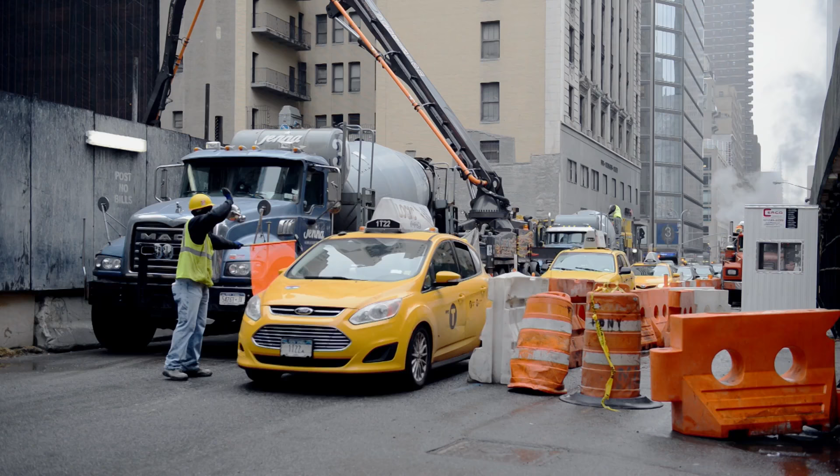The Woolworth Building, Chrysler Building, the Empire State Building. And at the time they were being built and topped out, 7 of New York City's skyscrapers were the tallest in the world. But after decades of rapid development, finding somewhere to build is tougher than ever. So as the population continues to grow, you need to come up with creative ways of how to build supertalls in Manhattan. Demand for high-end real estate is through the roof. In a city legendary for building big, raising superstructures no longer seems possible.

For thousands of years, Manhattan's 60 square kilometers was more than enough space for the indigenous Lenni Lenape people. The only dwellings they needed were modest bark-covered dome huts. But after European colonists arrived to the island in 1609, multi-story homes became particularly useful for the expanding population. The following century saw such rapid growth that by the late 1800s, the only way was up. And New York opened the world's first skyscraper.

Hooray! Bradford Gilbert's 11-story tower building sparked a frenzy of construction, which birthed more world record-breaking tall towers than any other city on Earth. But all this wild development has reached a tipping point, and New York is running out of space to build. But now, engineers in New York are taking on that challenge. Jutting out from the swarming skyline is an entirely new type of superstructure.

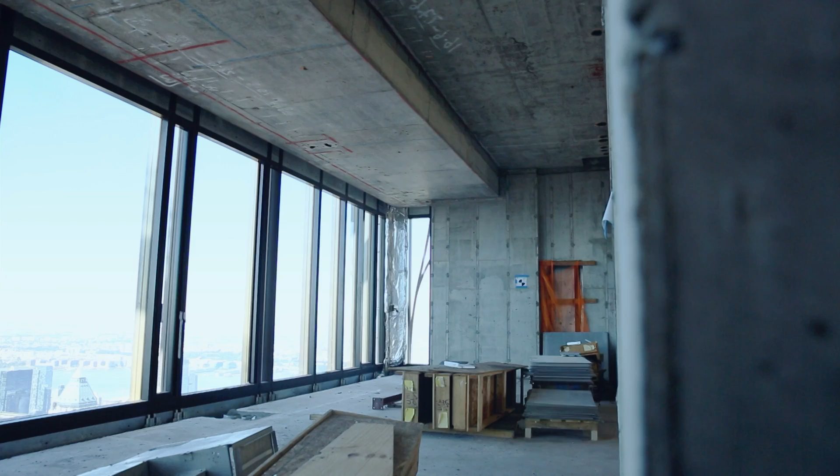This is 111 West 57th Street. Not only one of the tallest residential towers in the world, but also the most slender building ever constructed. Designing a building like this is a once-in-a-lifetime opportunity. This is definitely one of the most complicated, if not the most complicated, residential build going on in the world right now. What you don't see is all of the engineering feats that are behind the walls. You have all these different components that are tied together that are just incredible. Protruding from the ground, this gravity-defying giant marks the dawn of a new age of skyscraper.

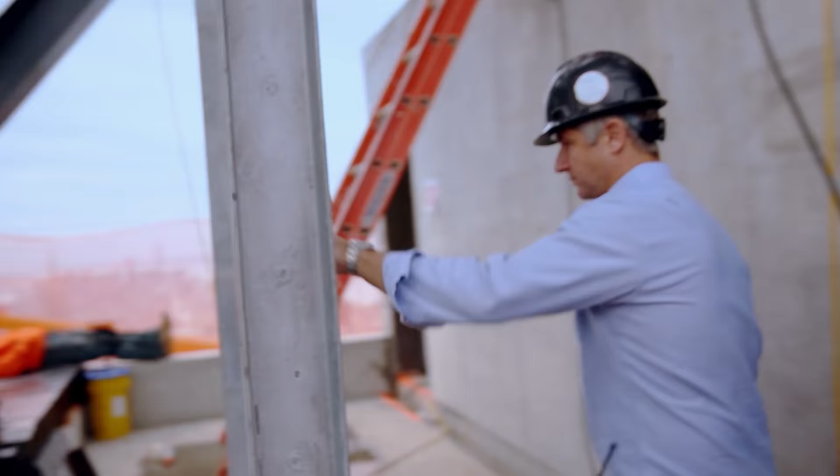Takes about 7.5 minutes to get all the way up. It's a pretty nice ride. Going all the way up, Tommy. Once you clear all the surrounding lower buildings, at this height, it's another planet, another world. This is the reason why we're building this. At 85 stories above the ground, the construction hoist reaches its limit. To venture even higher, John must climb to the steel summit.

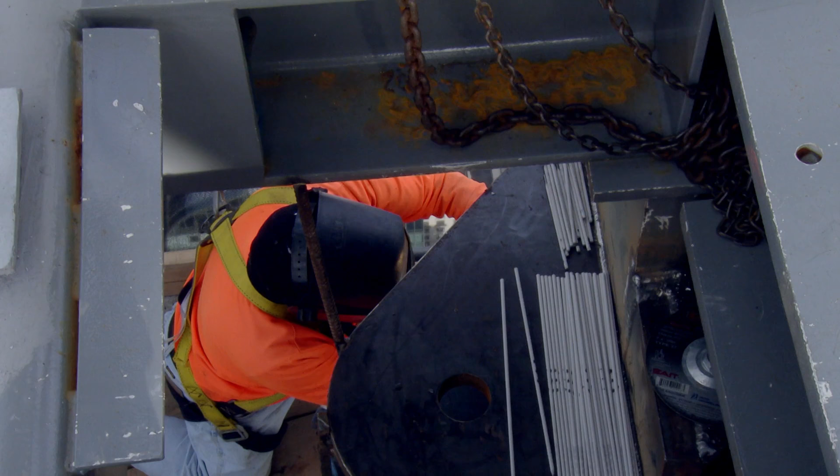So right now we're standing higher than any of the viewing platforms in all of New York. When you're up at this elevation, you got 360-degree views of everything surrounding Manhattan. You got Central Park to the north, Statue of Liberty, the Freedom Tower. It really is just breathtaking. It's iconic and has the same type of feel that the Empire State Building had when it was being built.

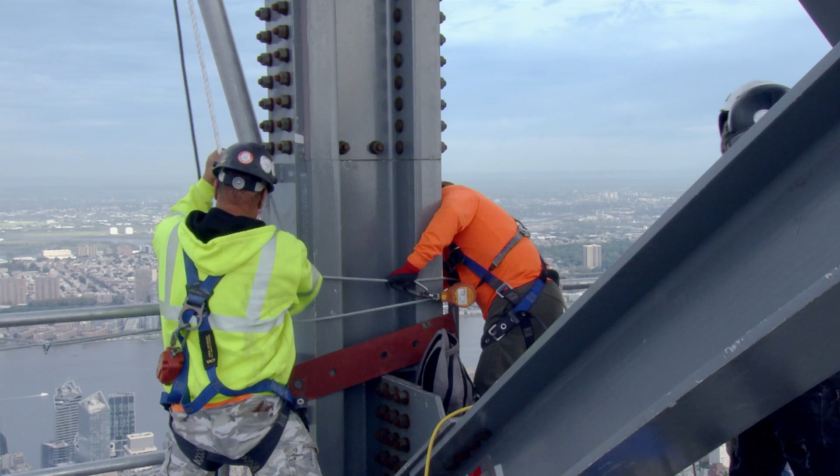111's daring construction team reach heights few have ever been to. They are the only people to have ever experienced the tower's unrivaled views over New York City. Up here, we have ironworkers. They're bolting up, erecting the steel, which is pretty challenging up at 1,300 feet in the air, up to 1,400 feet. It's pretty intense. Every day, I'm blown away by the amount of engineering and time and planning that goes into putting this type of a building in place.

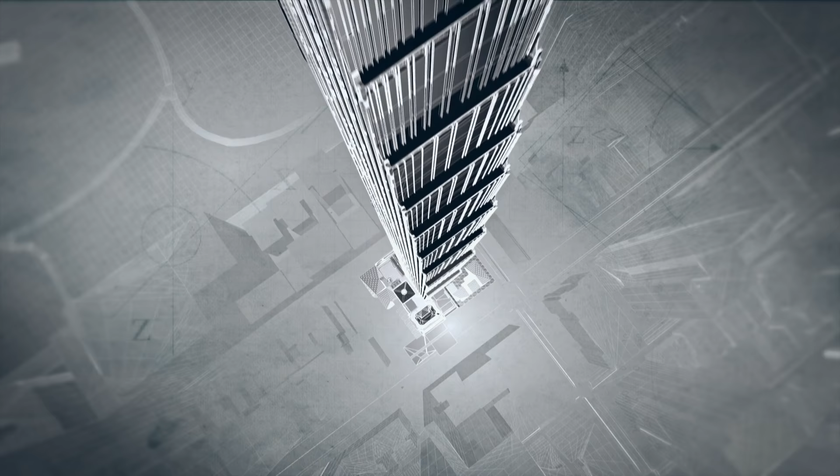Partially built over the historic Steinway Concert Hall, 111 West 57th Street sits on an astonishingly small plot. The tiny 18-meter wide site bears New York's third tallest tower that reaches a staggering 435 meters into the air. With a width-to-height ratio of 1 to 24, it is the most slender tower on the planet. The tower is flanked to the east and west by huge concrete shear walls, 383 meters tall, and capped by a 52-meter steel crown, making it the second tallest residential building in the Western Hemisphere.

What gets me out of bed in the morning is to take on the challenges of finishing this, putting this job together, and getting it to completion. So there's no rest until it's done.

But this ambitious project poses serious engineering challenges. How do you strengthen a skinny structure without giving up floor space? The challenge is, how do we get rid of columns like this, minimize it, to open up the floor space? You can't just take the columns out. There needs to be something there that supports the actual structure itself.

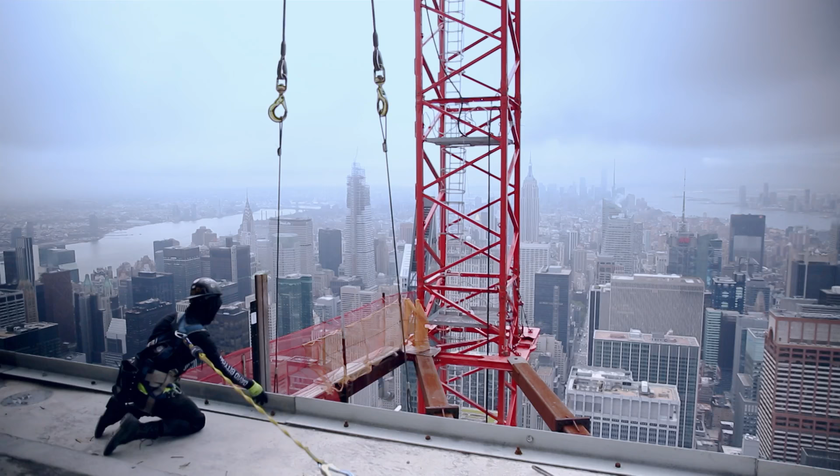And to make it all worth it, where do you find colossal, crystal clear windows worthy of the view? From top of slab to top of slab, it's 15 foot 6 inches, and we needed to make extra large panels in order to accommodate that ceiling height.

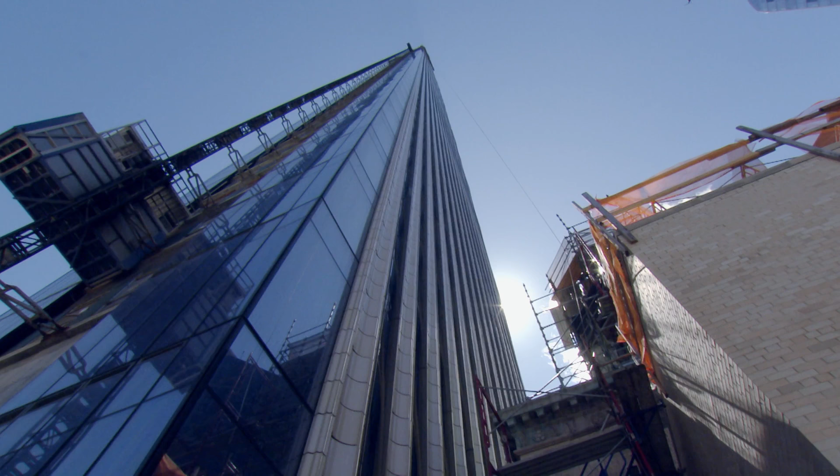But the biggest problem of all, how do you protect such an incredibly thin tower from the battering winds? As you can see, the building is slender. In order for the building to stand up tall like this, we have to engineer it in a way so the building can stay as is.

The iconic New York metropolis. Arguably the most celebrated city on the planet. Famed for its extraordinary skyline of mega towers. But with space to build running out, engineers are forced to come up with an extreme solution. Building not only super tall, but super skinny. The world's most slender tower soars above Billionaire's Row as the third tallest building in New York City.

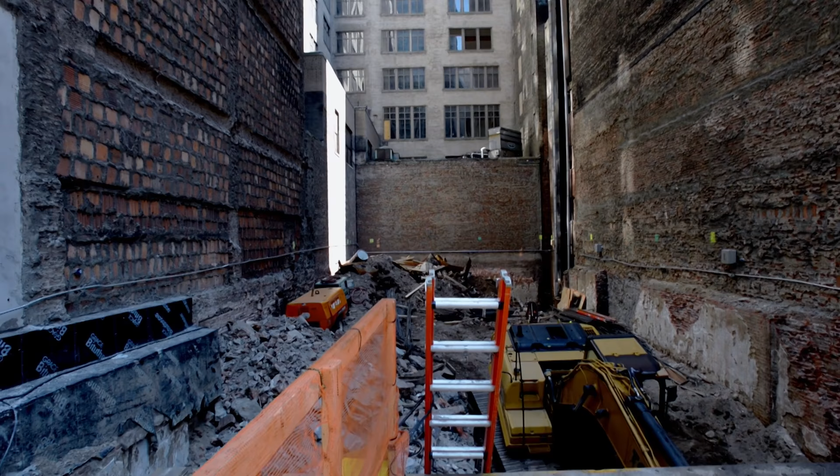But without the bulk to weigh it down, how does such a narrow building stand strong? It's down to engineer Cynthia Liu to protect the super-slender skyscraper from storm force winds. As we can see here, this is the existing Steinway building, and next to the Steinway building is the new plot we have to work with. From this angle, you can really see how narrow the new building is. Before construction began, the available space to build on was a cramped site only 18 meters wide.

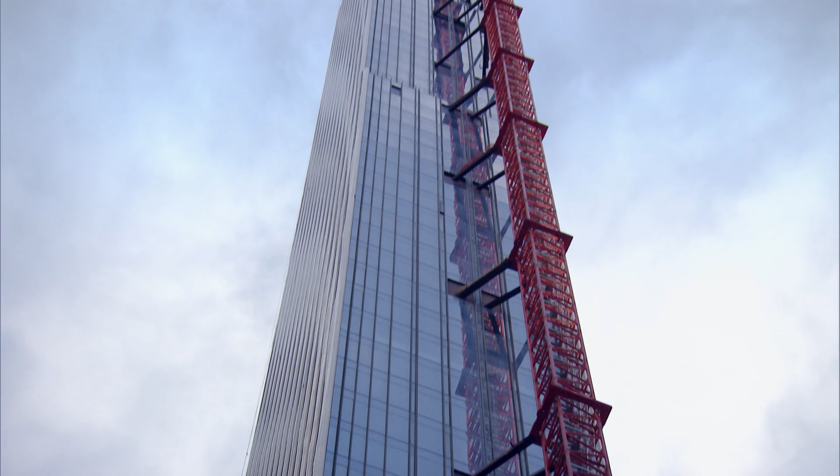As you can see, the building is slender and it doesn't have a lot of footprint to sustain the load that's applied to the building. Most of the buildings will have the load imposed on the rock. But here, because the building is slender and it has to take the wind load, at the foundation of the building, there's a lot of uplifting load. It needs to be engineered and taken care of, so the building doesn't fly away in the wind.

Without a wide base to support the tower, how can engineers brace it against the wind? They'll have to search for a pioneering innovation buried in the past. Cork Harbour. A vast network of busy shipping channels on the south coast of Ireland. Engineer Magda Heidekiewicz is searching for a relic of nautical navigation.

For hundreds of years, the beautiful Cork Harbour has been a very busy port. It was a gateway for trade and migration and a very important naval base. The waterways connecting to the city are very shallow at places and require careful navigation. Otherwise, the ships can run aground. There used to be floating lights to indicate the shallow waters of Cork Harbour. However, they would move around and can be even destroyed in stormy conditions. A more permanent structure was needed to withstand the force of the tides.

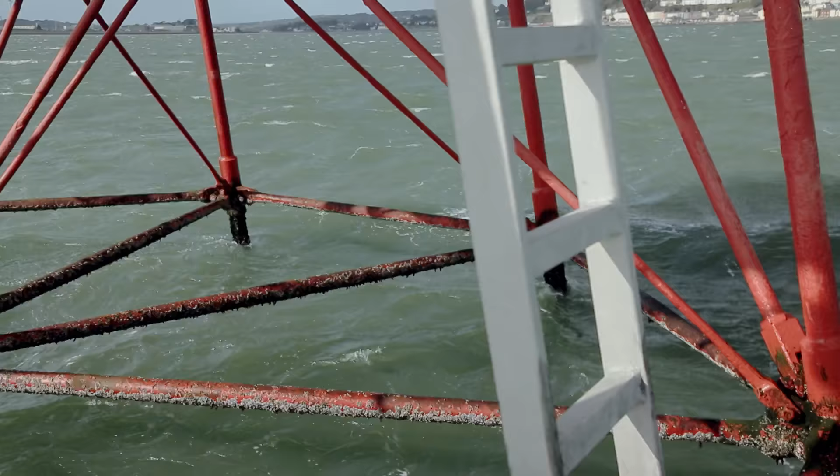Despite being blind since the age of 22, engineer Alexander Mitchell had no problem in visualizing a solution. In 1833, he patented a clever device that enabled him to build a structure where no one could before. This is the Spitbank Lighthouse, protruding from the water on wrought iron stilts. It was built in 1853, 166 years ago, and it still withstands the powerful forces of the ocean.

Rising out of the harbour, the iconic beacon stands in stark contrast to traditional stone lighthouses on the shore. Supported on 9 enormous iron legs, each one 14 metres long, resembling a giant spider in the sea. What Mitchell decided to do was place 9 stilts that would be sitting on the seabed.

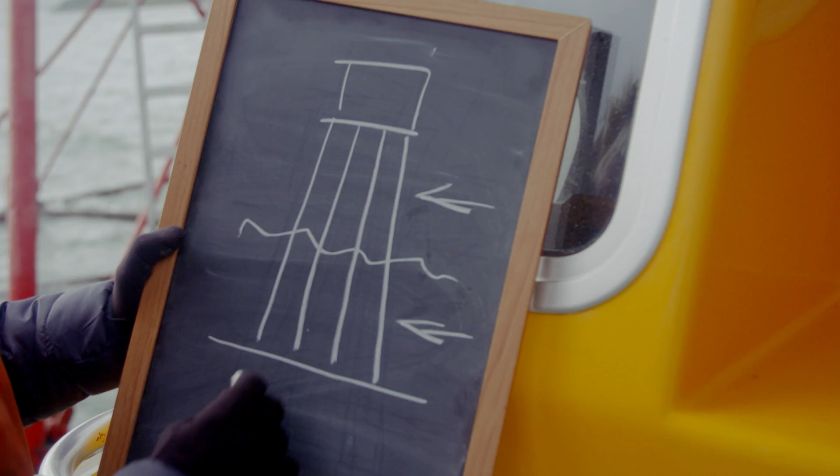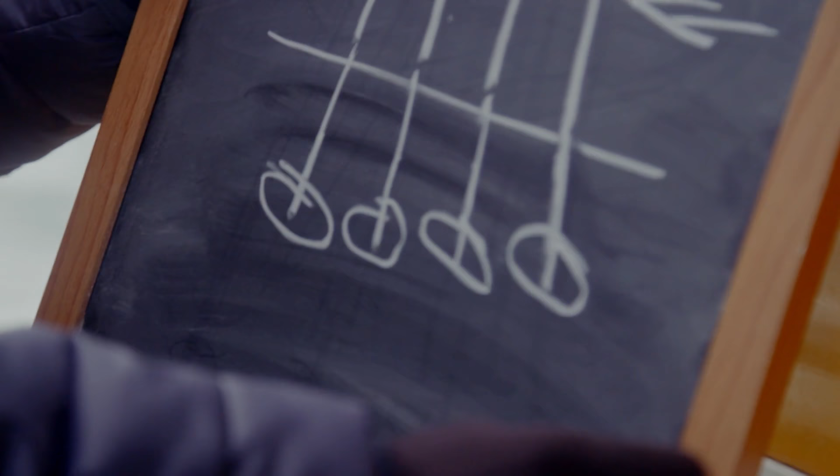However, that wasn't good enough to withstand the powerful lateral forces of the tide and also lateral forces of the wind. He had to extend those stilts down to the ground, but those stilts could be pulled up from the ground, so he had to anchor them down. So the very crucial part of the solution are the ingenious anchors that Mitchell came up with.

To secure the stilts 5 metres below the seabed, Mitchell relied on his own brilliant invention. Drawing inspiration from the corkscrew, he deployed crews on floating rafts to turn the supports and twist them into the ground. Fastening the framework to the seafloor has locked it into place against the wildest winds and waves.

Whoa! We are now 9 meters above the seabed. It's really windy, very strong lateral wind forces and tidal forces. I can't even imagine how it could be here in a storm. The forces must be just enormous. But the structure is not going anywhere. It's very stable. The anchors holding this structure stable in such strong winds would become handy when building a tall skyscraper.

Spitbank Lighthouse has become an icon for the city of Cork, standing proud in the bay as testament to the resilience of ground anchoring. When Mitchell designed the structure to withstand the forces of waves and wind, he made it stronger than anyone could have imagined. I doubt he thought that this structure would still be here 166 years later.

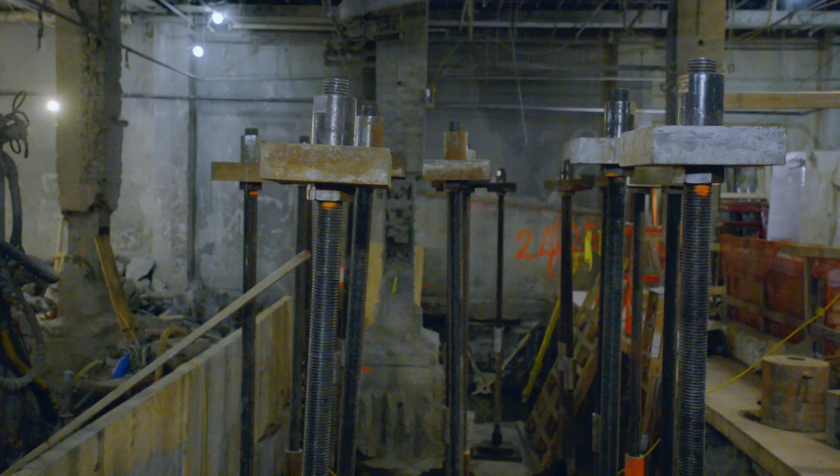In Manhattan, engineers have taken the ground anchor concept and supersized it. Securing New York's 3rd tallest tower to the ground is an immense anchoring system that Mitchell could only have dreamed of. Tasked with fastening the building in place, engineer Cynthia Liu is heading down to the subcellar in the lowest accessible part of the building. In order for the building not to tip over, we have 192 rock anchors.

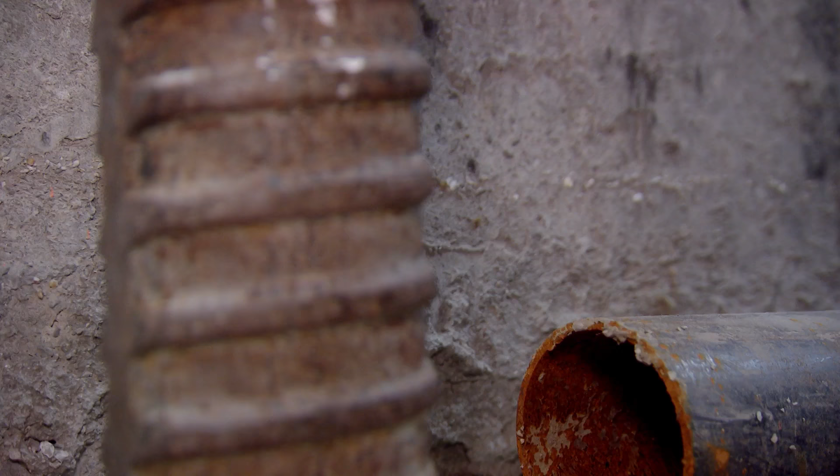This is the rock anchor that's used on this job, which is, as you can see, pretty heavy and hard to lift, even a small piece like this. And we have about 50 of them in this wall here. The rock anchors we used in this building are the heaviest you can get on the market.

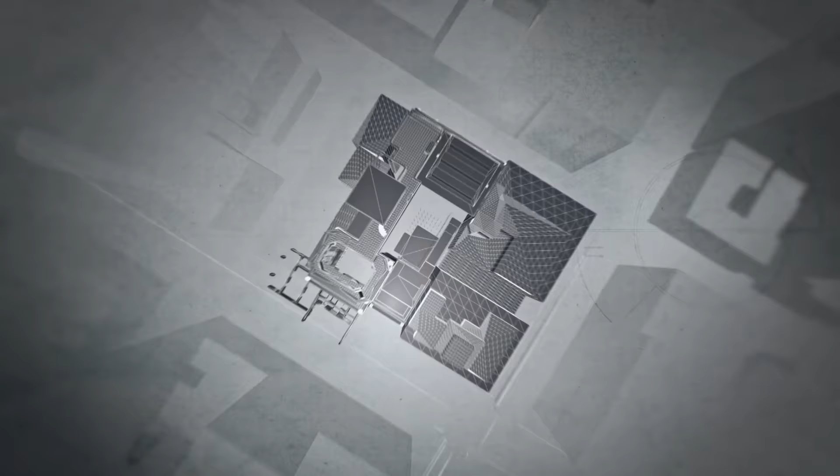Once the foundations of the historic Steinway building are carefully excavated, an incredible 192 gigantic steel rods are drilled nearly 23 meters down into the bedrock. In this case, they're not screwed in, but instead expand to lock into the rock. As lateral wind hits the tower, the anchors can withstand a tremendous uplifting force of 52,000 tons. Taking the team over a year to complete, before they could even begin to erect the tower.

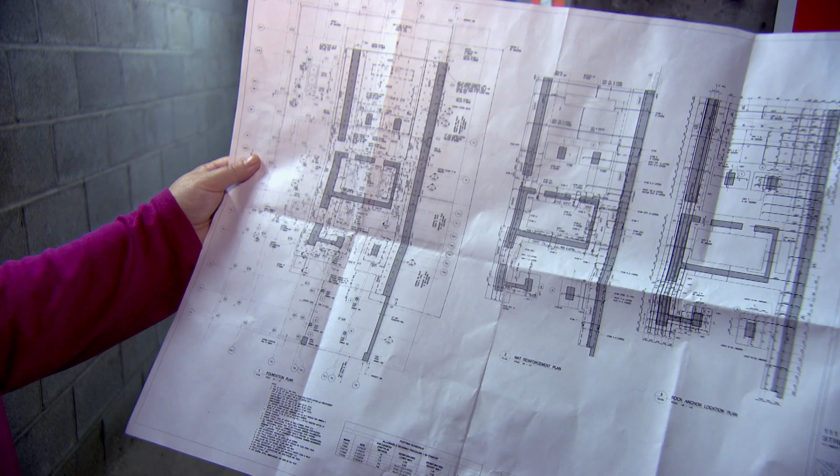This is the design drawing that we issued for this building. You can see all the little dots representing the rock anchors. All the forces are transferred to the rock anchors in the area. The rock anchors transfer to the rock underneath. So the forces are transferred from the top all the way to the bottom.

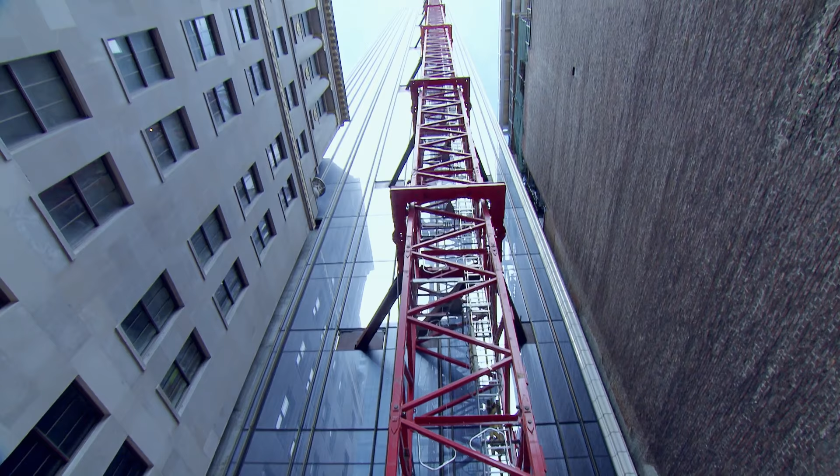Building on Mitchell's remarkable concept, the team have installed one of the highest concentrations of ground anchors seen on any skyscraper in the world. Each rock anchor is about 3 inches in diameter, and they vary from 50 feet to 75 feet deep below the rock. So that's holding the building. Without the rock anchors, the building definitely would turn over in the wind load. So definitely we need the rock anchors to hold the building down.

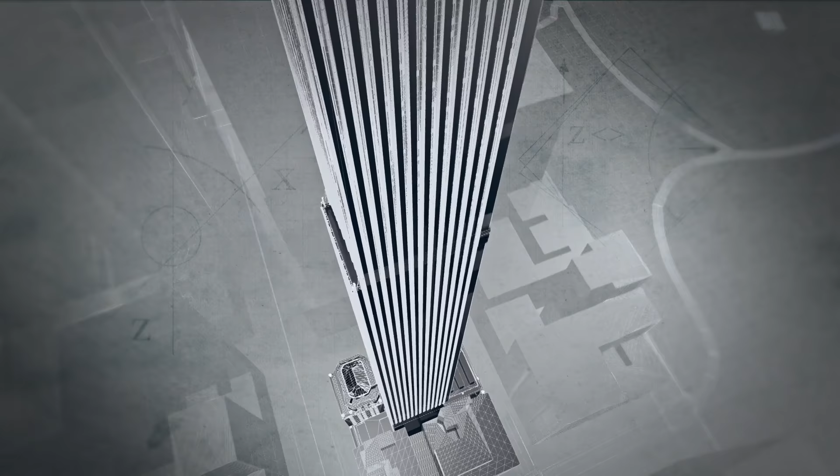Now that a strong foothold has been established, the super-slender skyscraper can rise into the clouds. The tower is constructed from super tough concrete weighing over 77,000 tons. When complete, New York's latest megastructure will soar above almost every other building in the city. Manhattan Island, crowned home to the planet's tallest tower more times than any other city. And this ever-evolving metropolis is about to break another world record.

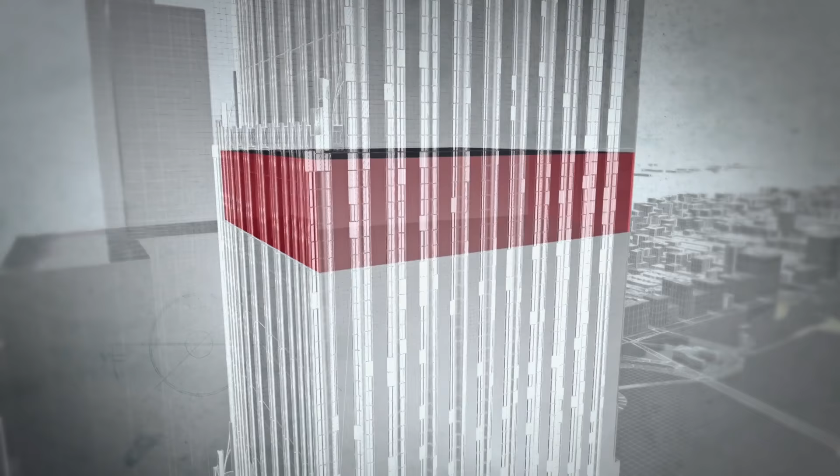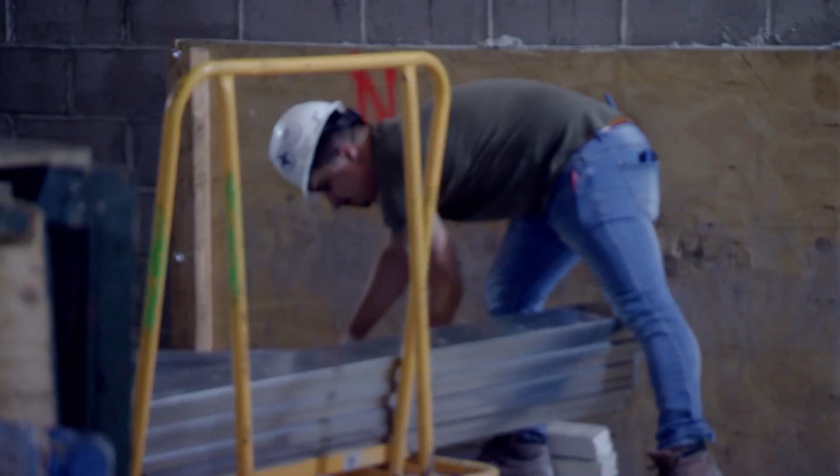Rising from a tiny scrap of spare land is the most slender tower on the planet. 60 vast apartments will each occupy at least one entire floor, as well as 6 two-story penthouses. But where the winds are high, so are the stakes. Even once secured into the rock, the superstructure is exposed to the battering elements. Protecting it from bending and breaking is top of the agenda for project director John Szykalski.

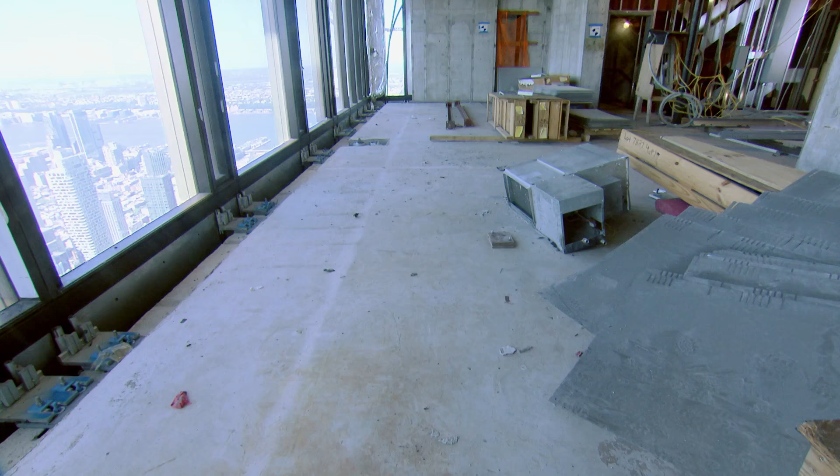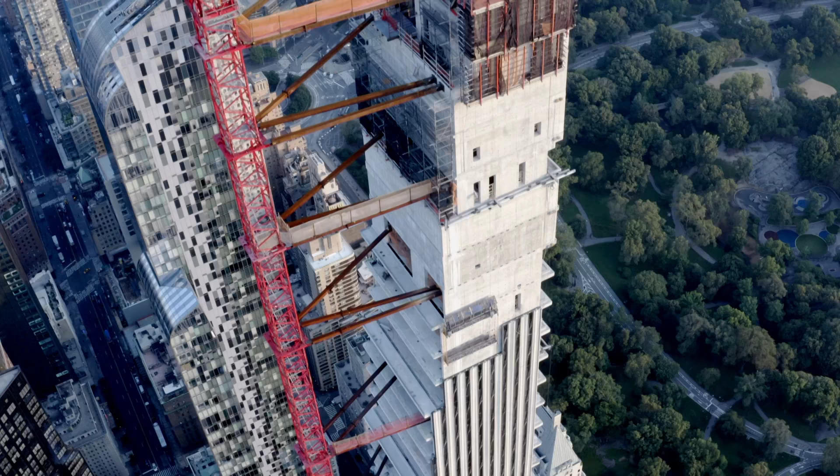Both floor space and rigidity are crucial in a residential high-rise. Defending the slender tower from breaking in the wind might be impossible without the innovators of the past. Chicago, the Windy City. Famed for a skyline punctuated by soaring skyscrapers. This view never gets old. It's one of the world's great skylines.

Architect and historian Tom Leslie is in search of a daring innovation amongst the city's towering giants. Chicago's the city that really pushed the development of tall buildings further than any other city. This was a real laboratory for tall building construction. So the big development was to move away from brick construction and to replace that with steel.

As buildings get taller and taller, they start to get so tall that the steel frames are too flexible. They move too much in the wind. And there's a limit to how tall you can build a steel frame. Beyond that, engineers are looking for another way to help stiffen the buildings.

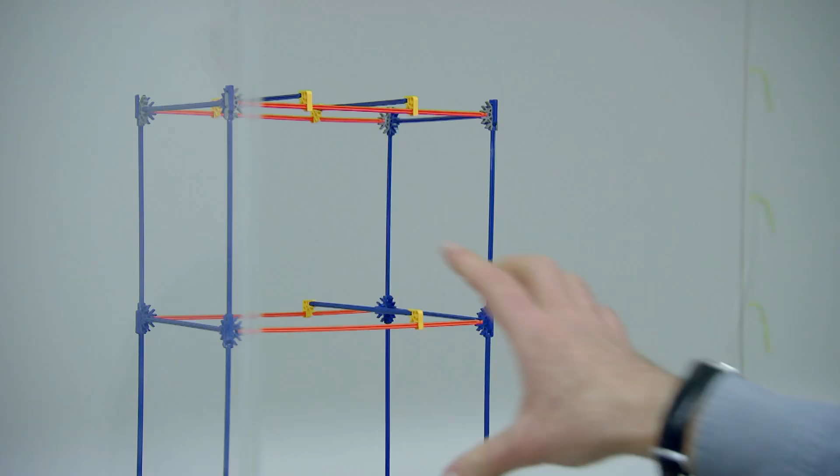To demonstrate the problem, Tom has scaled it down. So we have here a working wind tunnel that's used to test skyscrapers to see how they respond to wind. We're going to use it to test this model of a frame. We have girders, we have beams. So we have here a curtain wall. It has no structural capability on its own. It's very much like a glass skin that you would hang on the outside of the structure.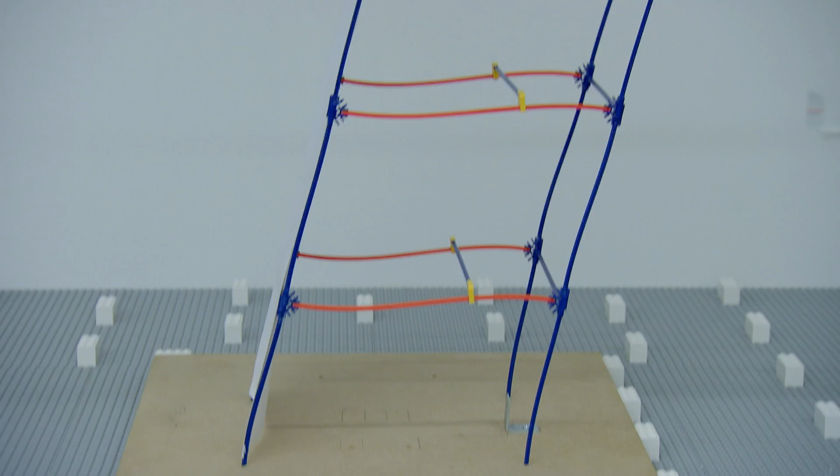We've turned the wind on, and as you can see, it's having quite an effect on our building frame. It's deflecting quite a bit, and it's moving quite a lot. It's not a building any of us would ever want to be in. We have to find another way to help stabilize it, to make it stiffer against the lateral force of the wind. So one way we can stiffen the frame is we can take pieces of the building that we already have, elevator cores, fire stairs, things like that, and we can put a very massive, stiff core around them. But a large core, or even columns, take up valuable floor space.

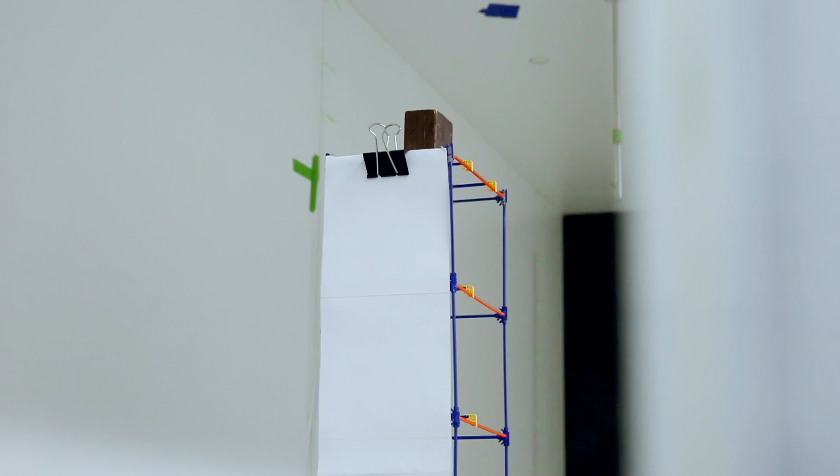So what we've done is we've taken our giant core and we've put it right in the middle of the building structure. It's bearing on several of the beams, which in turn are sitting on the girders. So you can see that the central core is working, it's stabilizing the building, but you can also see that the frame is still moving quite a bit. The other problem with such a massive core is that it's taking up more space than we'd like. We're not able to rent out the space that's within the core.

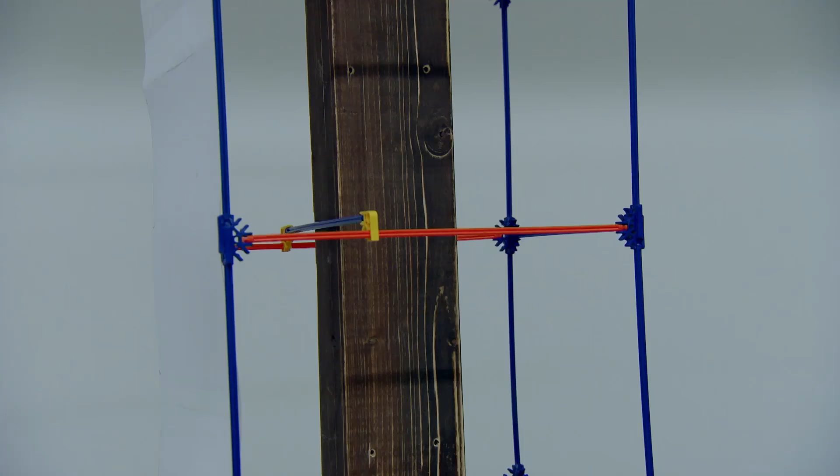When faced with the challenge of bracing a tower without compromising floor space, engineer Fazlur Khan conceived an ingenious way to utilize pre-existing structural components. His remarkable space-saving technique was the shear wall interaction system. We can take the wind resistance that that massive core has and spread it out into a pair of shear walls, tall planes that line each side of the building and resist the wind. This spreads the resistance that the core has out, which will give us the open floor plates that we want.

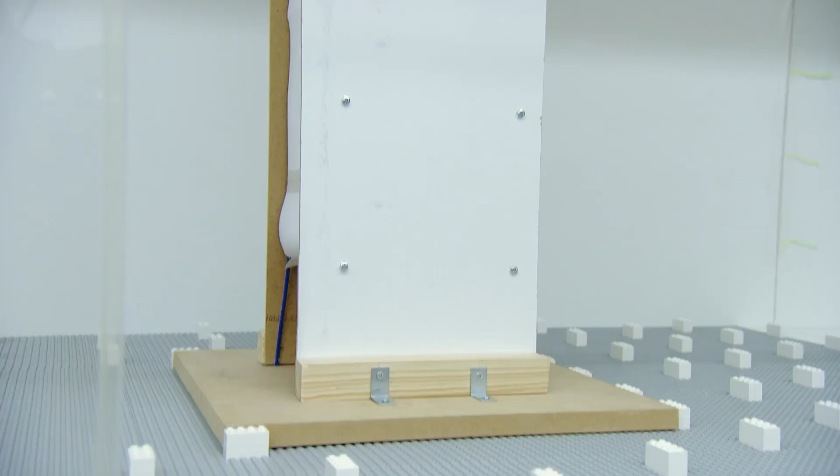With rigid exterior walls, the size of the inner core can be reduced. And Khan's clever addition was to connect the components with stiff structural floor plates, so that the whole system worked as one. We've turned the wind on, and as you can see, all of the pieces of the building are working together. We're taking advantage of the stiffness of the shear walls, the stiffness of the core, the stiffness of the floor plates. All of them are working together to create an integrated wind-resistant system.

And Khan was able to prove his theory worked on a scale never seen before. This is the Brunswick Building, the world's first tower to be supported by shear wall interaction. The Brunswick's exterior structure is 4 massive shear walls. On the inside, there's a set of shear walls within the building core. To tie these two systems together, Khan designed very, very stiff concrete floors that ensure that when one system moves, the other system has to move as well.

Khan used things that were already there, and so the floor plates in the Brunswick Building are all open between the core and the exterior wall. More than 80% of every floor is rentable, which is an incredibly high number for the era. Braced by shear wall interaction, the Brunswick Building opened in 1965 as the tallest reinforced concrete structure in the world.

Fazlur Khan's idea of shear wall interaction is an incredibly clever solution to the twin problems of building stiffness and retaining as much open floor space as possible. The Brunswick was a building that was miles ahead of its time when it was built, and it's a building that was influential for generations, even down to today.

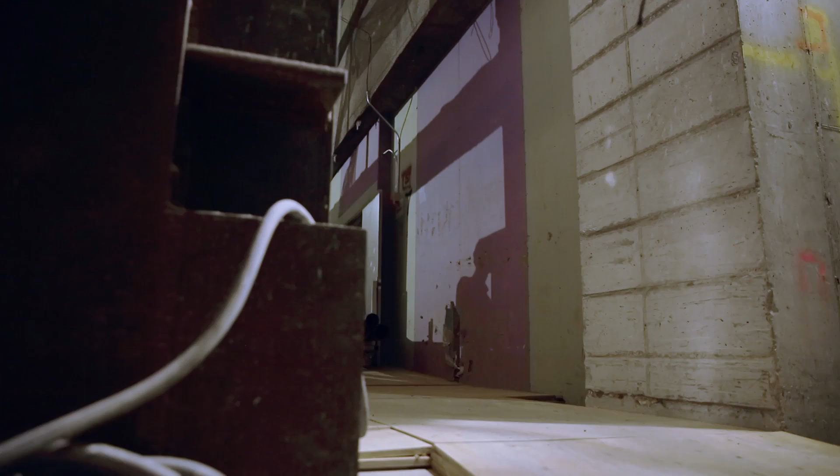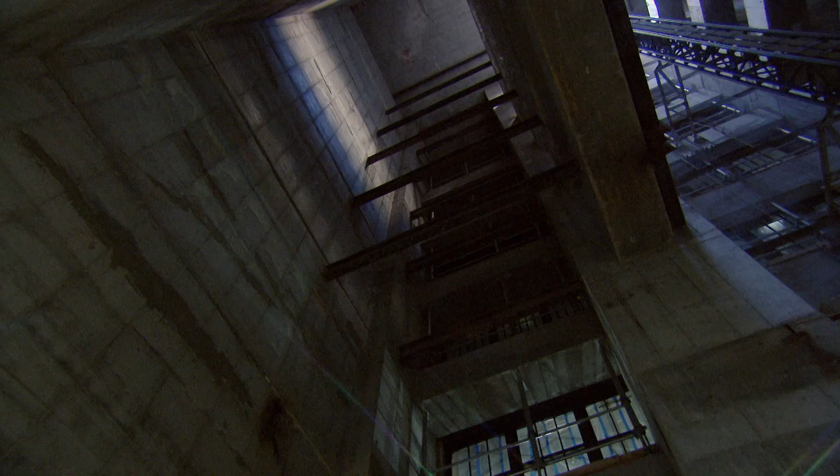At New York's sky-high megastructure, engineers are taking Khan's pioneering technique to new heights. Just like in Chicago, they're bracing the high-rise with a shear wall interaction system on a colossal scale. So here we are on the lower floors of the actual superstructure, and you can see how big the shear walls are. They're over 5 feet thick down at the base of the building. They're pretty massive. The shear walls here extend about 60 feet below street level to 1,257 feet in the air. They are some of the tallest shear walls on the planet.

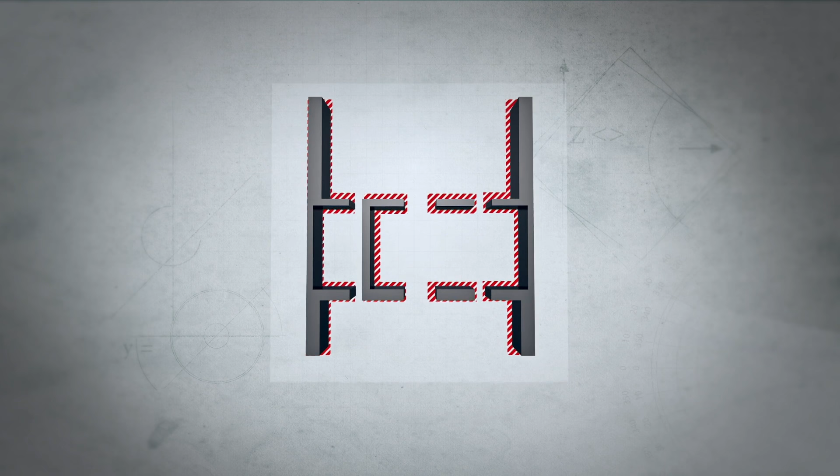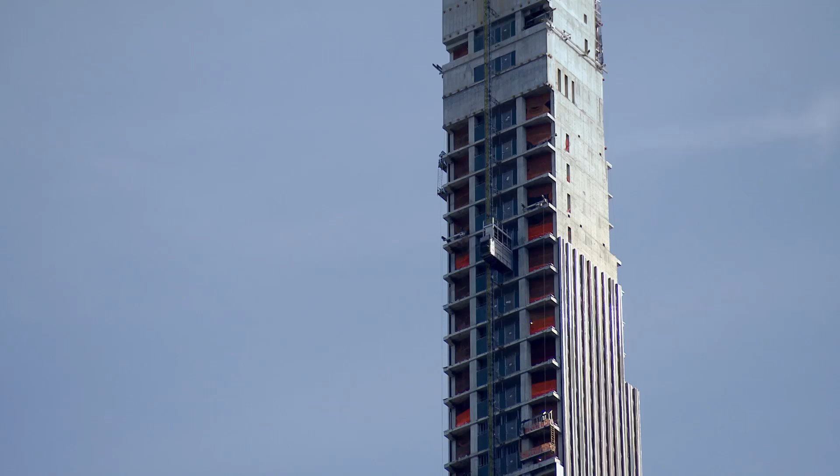The interaction system at 111 West 57th Street has 5 shear walls, all working in unison. The east and west walls form the exterior structure and flank 3 core shear walls, including the elevator shaft. As 37,000 cubic meters of concrete is poured, 1 floor at a time, the configuration rises like an oversized I-beam to over 380 meters high. As the mammoth shear walls climb to the highest levels of the tower, they undergo a transformation.

So here we are on one of the upper duplexes in the tower. And as we get higher up in the building, the shear walls take a step in two directions: lengthwise, they shorten up, and widthwise. So you can imagine this wall was over this wide down in the subcellar, and as you got up into the building, it's about 1.5 feet thick. By having thinner walls up top, it increases the usable floor space and apartment space actually on the floor plan.

Not only do the shear walls taper in width, they also take steps in length to create the tower's feathered profile. 85 stiff concrete floors tie the system together, forming one massive monolithic structure. Should wind hit from any direction, the load is transferred through the rigid components downward into the 20-meter thick concrete foundations.

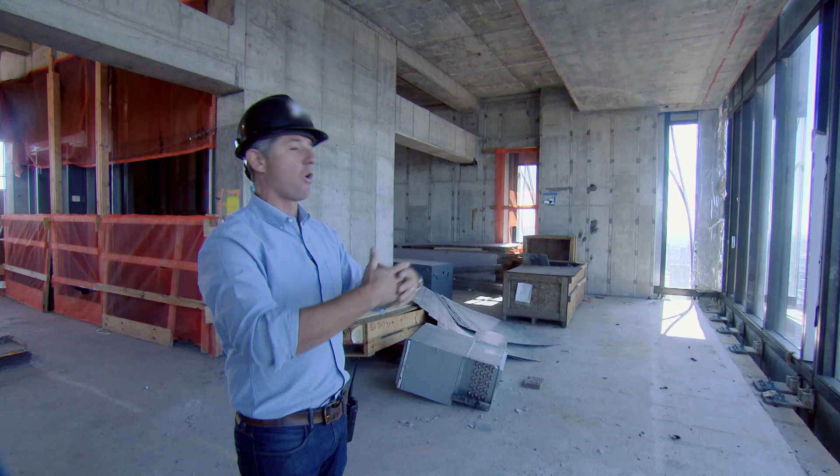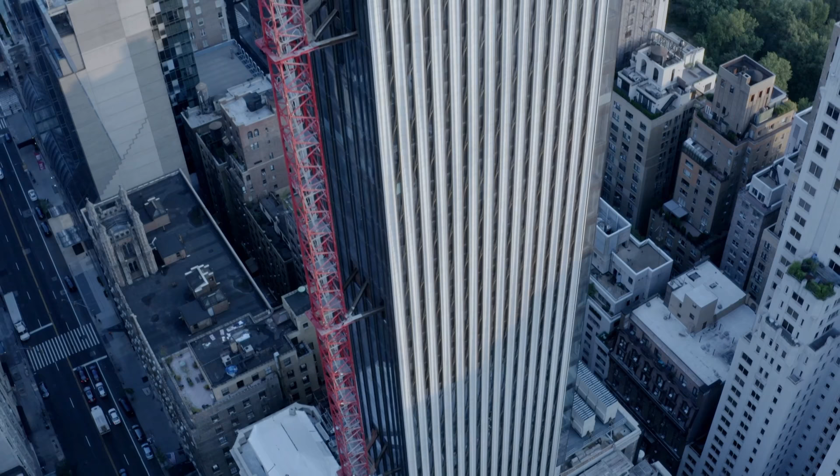So the giant columns you saw down in the basement no longer exist up here, which opens up the entire floor space. By pushing the limit of concrete construction, the monumental project at 111 West 57th Street can climb into the sky. The shear walls act just so much more than regular walls. They're transferring all the forces down into the foundation. Without the shear walls, there's no way this building would have been possible. All the engineering that's gone into the design of the shear walls, being able to handle all the outside forces, is just unprecedented.

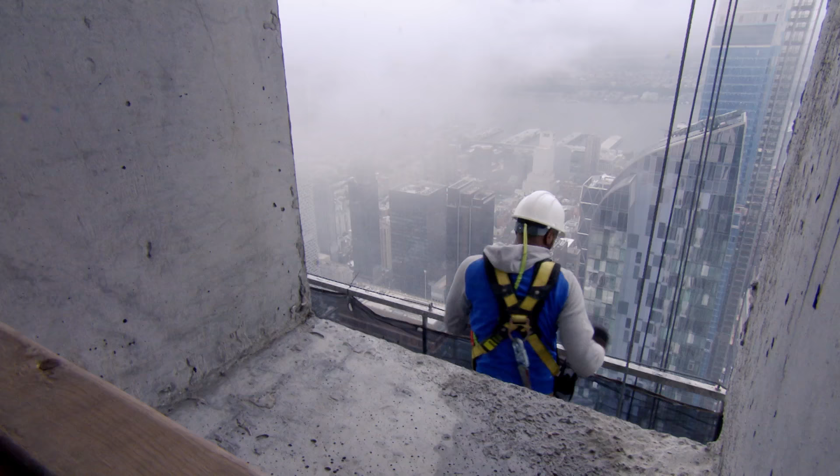With the monster shear walls topped out, the building stands proud over New York. But left untouched, a colossal concrete pillar could be an eyesore on the city's skyline. Architect Dana Getman has a creative solution to make the super-slender stand out. This tower is really unique in that the east and west facades are the structure. And to really take advantage of that, we clad it with this beautiful terracotta, which we designed with a waving undulation of shapes that'll create a shadow pattern as the sun casts across the facade.

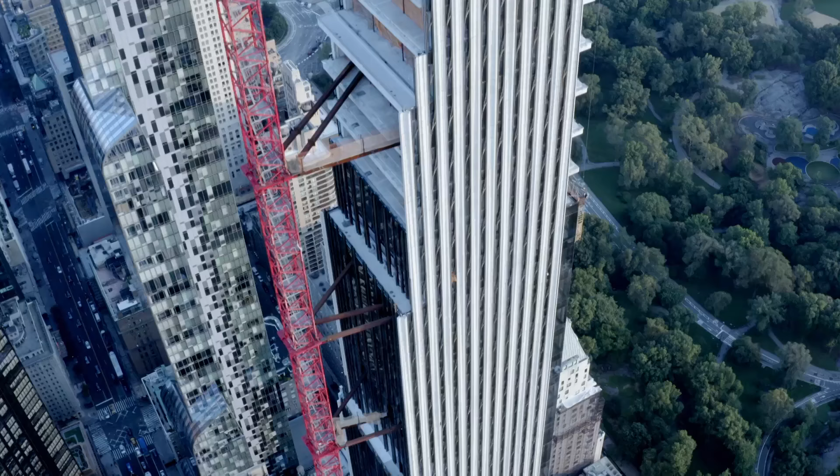When we started the design process, we really looked at the DNA of New York City buildings. We really wanted to get that richness, but in a contemporary design. But the building's distinctive form makes facade installation extremely challenging. It is unique to have double shear walls on the exterior of your building. Most of the time when people install a curtain wall, you slide it to the edge and you hang it from the floor above. But when you're installing it on a shear wall, it's a little bit more complicated.

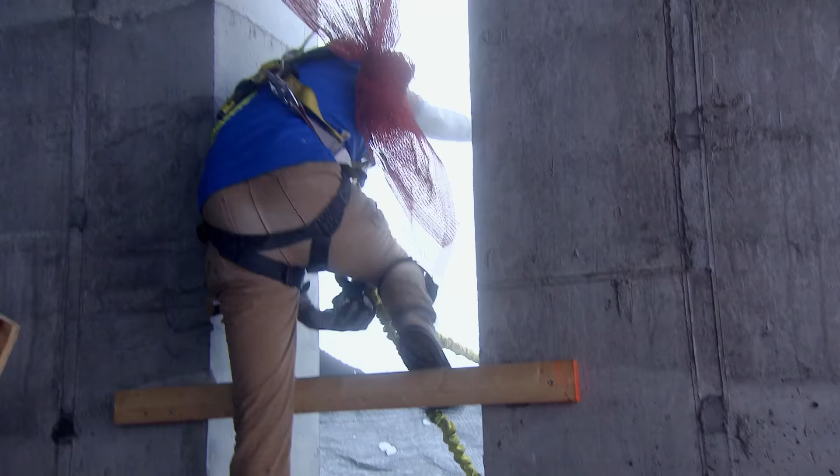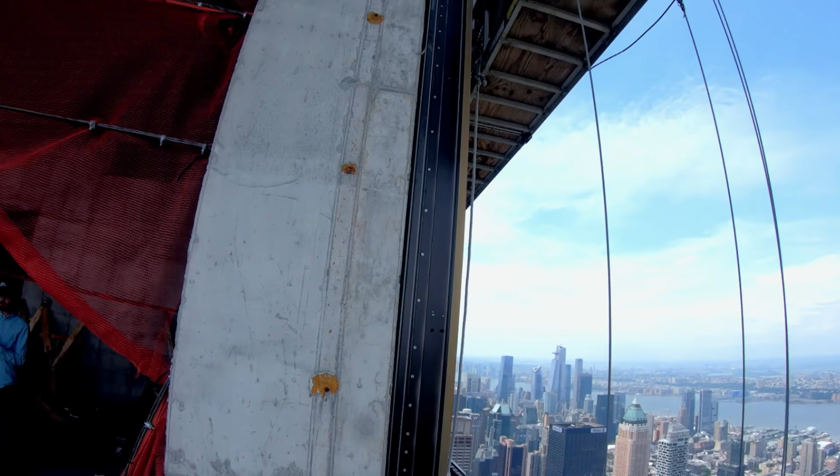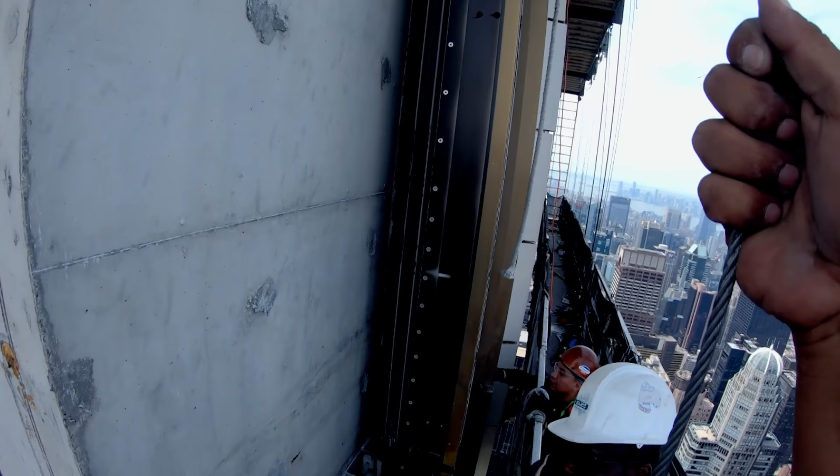With solid concrete obstructing the way, the team have come up with a bespoke installation method to navigate the unique wall configuration. The team here on site built the custom gantry to be able to take the facade panels to their position on the shear wall. Once hooked up to the crane, facade panels are flown out over the city, dangling hundreds of meters above the street. The enormous pieces are traversed around the outside of the shear walls to the installation team on the gigantic 2-stage hanging gantry. They have to change hands several times in a precise and delicate procedure to fix them to the east and west shear walls.

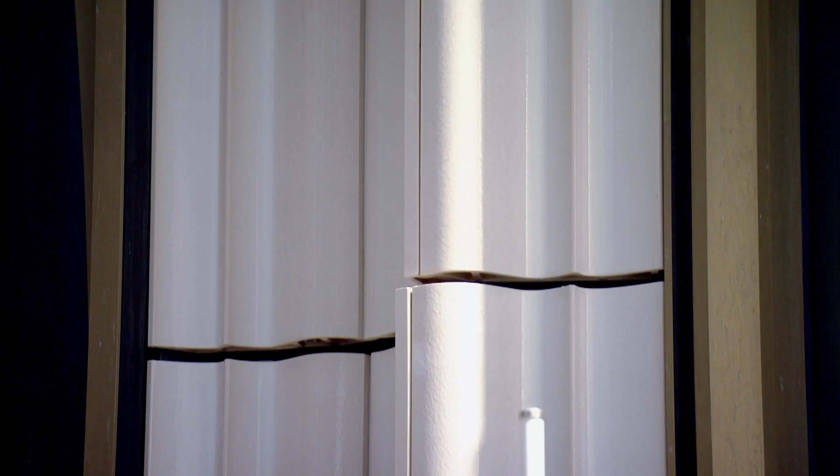The result is a striking hybrid of New York's Art Deco heritage with the cutting-edge architecture of the future. I am incredibly impressed with the team here on site and how smoothly the installation has gone. When you look at the building from a distance, you see the waves of shadow and you really see the impact of this building on the skyline. We couldn't be happier with it.

Soaring over New York's prestigious Billionaires Row is the city's latest mega project. 111 West 57th Street is the world's most slender skyscraper. Rising into the sky, it towers above the neighbors and the city below. Construction of the third tallest tower in New York is nearing completion. The project's final phase is underway, preparing 60 luxury apartments for habitation.

All right, you going all the way up? Yeah. When you're done, we got to pick up on one.

But to make the whole development worthwhile, Senior Project Manager Pat Feehan and his team have one last challenge to conquer. So right now we're in a hoist, which runs the north side of the building. Looking north from east to west, we're dead center looking over Central Park. It's a pretty incredible spot. The units that we have in this building are going to be the only units on 57th Street that are going to have a dead center view over Central Park.

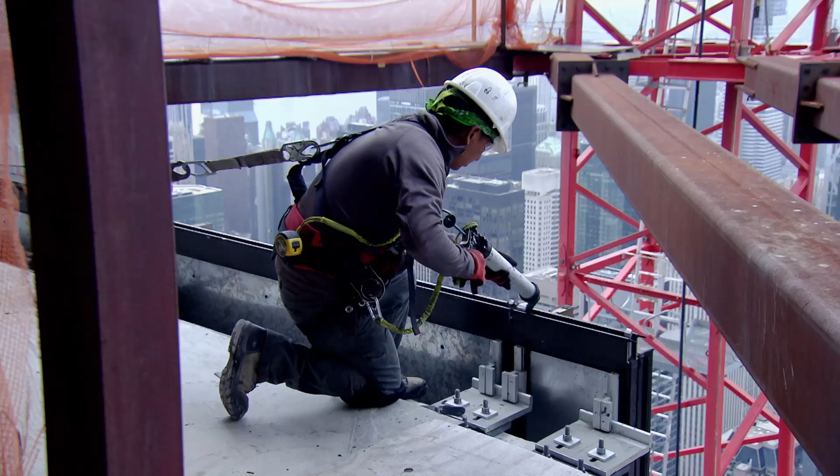Pat's team must take advantage of the tower's unrivaled vistas over the city. Not an easy mission to accomplish in such enormous living spaces. So our units are 15'6" from floor to floor. That creates the need for larger pieces of glass in order to maximize the views that we have. We need to find a solution to make sure that we can see them perfectly from the units. To find vast window panes worthy of the unprecedented panoramic views, the team must look to the pioneers of the past.

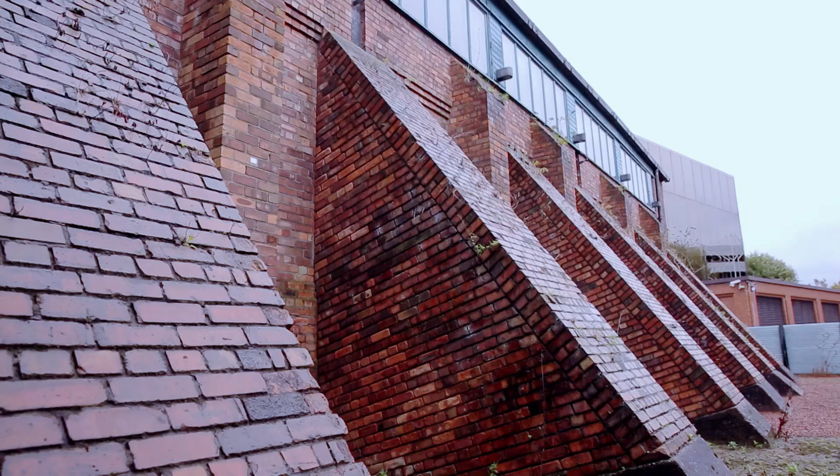St Helens, in the north of England, legendary for industrial innovation, where physicist Suzie Sheehy is heading underground in search of a development that shook the world of glass production. These tunnels are actually below a glass smelting furnace, and all around here there would have been coal fires that would have been so hot for the workers working down here.

What they were aiming for was to make large panes of glass for windows that were clear and strong and free of blemishes. So they'd take molten glass and pour it over a metal tray where it would cool down. But the result was something that was imperfect. It was blemished and rough. So then they'd have to grind and polish it. Even then, the panes they made were not super big. It was only up to a couple of meters. So to get something even bigger and better, they'd actually have to come up with a totally new solution.

But for Alastair Pilkington, the answer to the problem was crystal clear. In the 1950s, he developed a revolutionary new process. So this place is the solution that Pilkington came up with, and it's absolutely incredible. I've just seen in front of me here this huge, really flat sheet of glass. Absolutely beautiful.

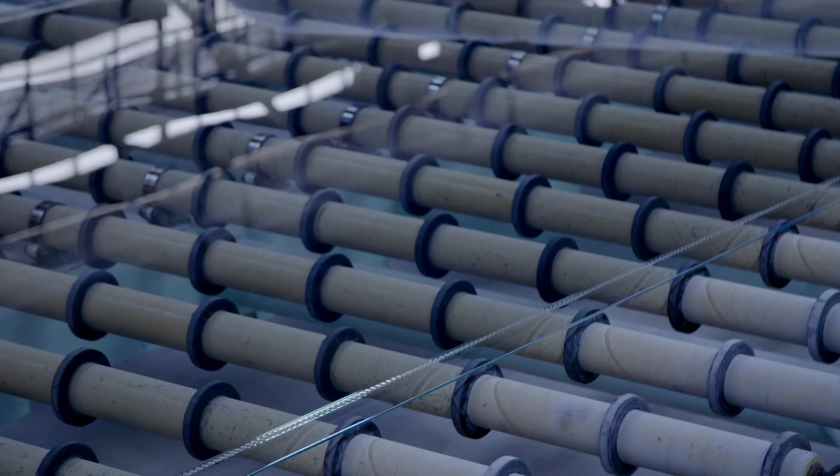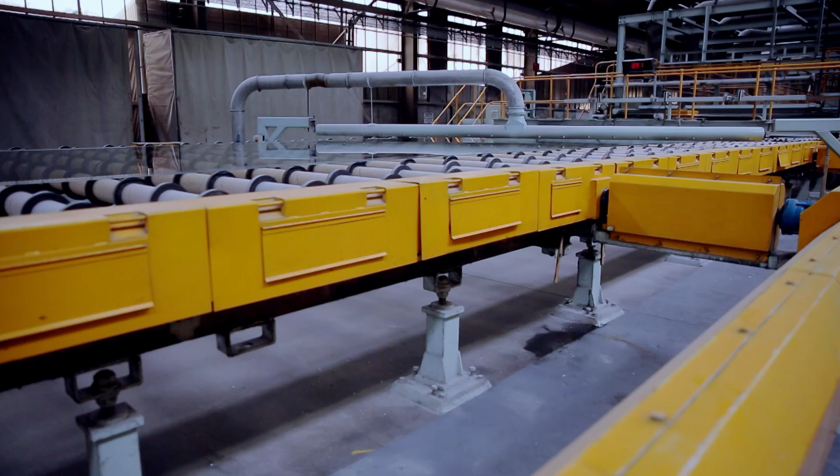Pilkington's float glass innovation, quite literally breaking the mold. It's so flat because they pour molten glass onto a bath of molten tin. And that's so flat that it comes out in these enormous sheets. They're just incredible. This cutting-edge plant has modernized its machinery, but remains true to Pilkington's technique. Oh, wow. I can feel the heat radiating off this.

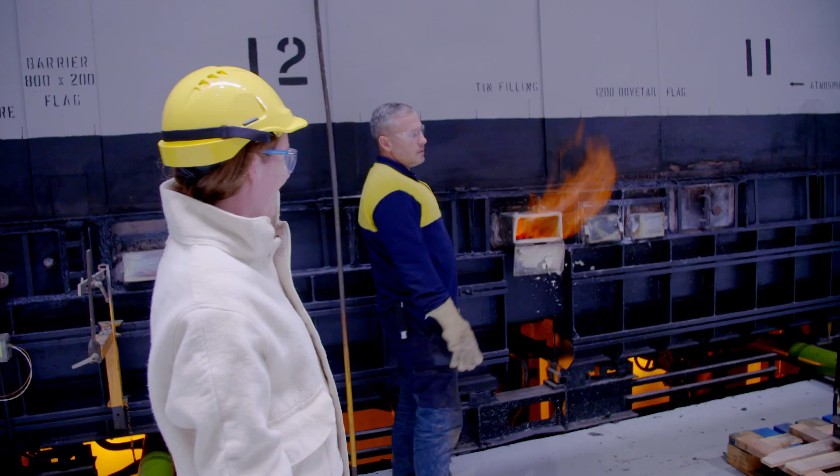For any glass production process, a sand-based mixture must first be melted to a scorching 1,600 degrees Celsius. But what sets this extraordinary method apart is what happens next. Woo! Nice. The molten tin bath chamber, which first off needs to be fed with the raw material. So this is about 25 kgs, so it's quite heavy. So we just step to the side and place it into the box.

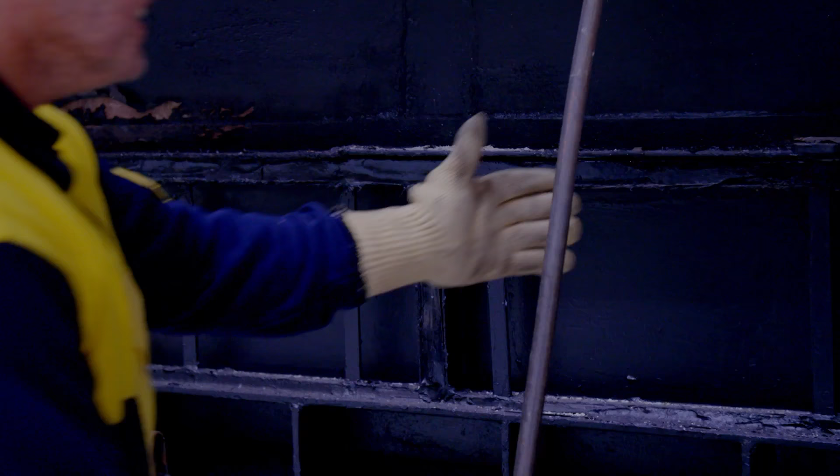That's amazing. And then I get to... Yeah, if you just stand back. Yep. Just push it gently in. That's it. Do I do? All right. Just leave it there, and you'll see it melted away now. Oh wow! I can see the ripples it's made. That's the tin. So that's the actual bath. That's the actual tin. That's what the glass is floating on.

Wow. So if you look at it straight up there now, that line that you can see, that's the actual glass there. So that's the glass floating on the tin. It just looks like a mirror. Does, yeah. As a liquid, the 800-degree bath of molten tin sits perfectly flat. Glass from the furnace pours like treacle over the lake of metal. And being less dense than the tin, it floats atop the surface, spreading and cooling in a flawlessly smooth sheet.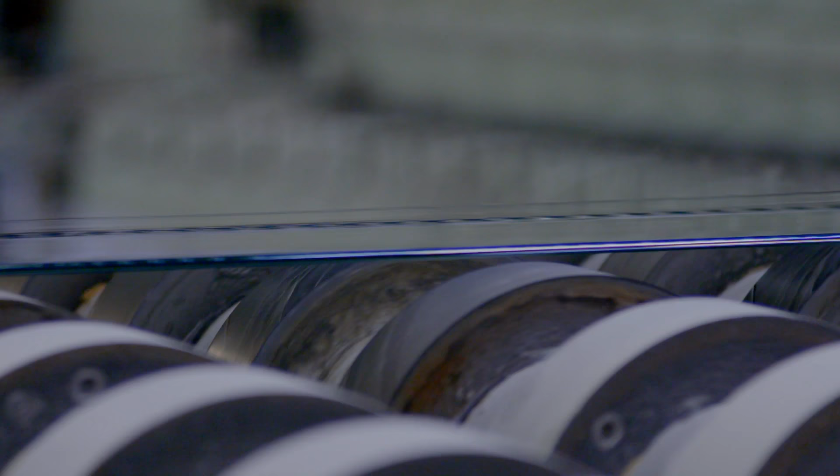The glass leaves the bath with so few impurities that it's crystal clear and incredibly strong. Properties that would make for great skyscraper windows. So this section is where the solid glass comes out, and it's really beautiful and flat and clear, perfect for windows. But when they first started using this float method, they had glass that was just 6 meters long.

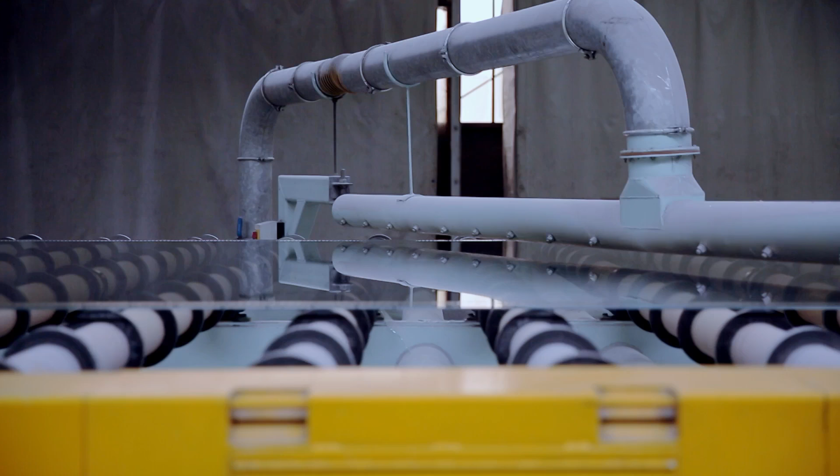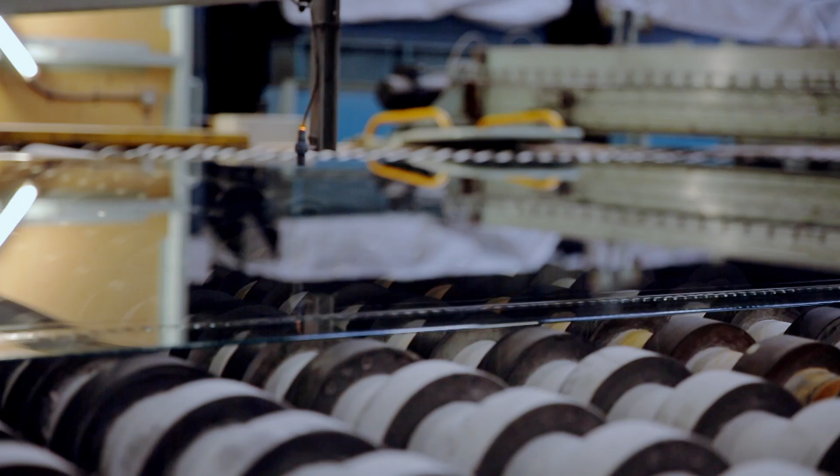But now they've perfected it to the point where they can just get a constant, unbroken flow of glass over this 600-meter length. And this one here, it works 24 hours, 7 days a week, and hasn't switched off for more than 7 years. It's so reliable. It's just an unbelievable method. The float line can run continuously for 20 years, producing 146 million meters of glass. Enough to wrap around the Earth 3.5 times.

So as it comes out here, I can't see a single imperfection in these panes. This method just produces perfect glass. There we go, so that one was about 6 and a bit meters long. They can make them up to 18 meters, which is just huge. And that's only possible because of this float glass method. Never before had glass had such strength and clarity.

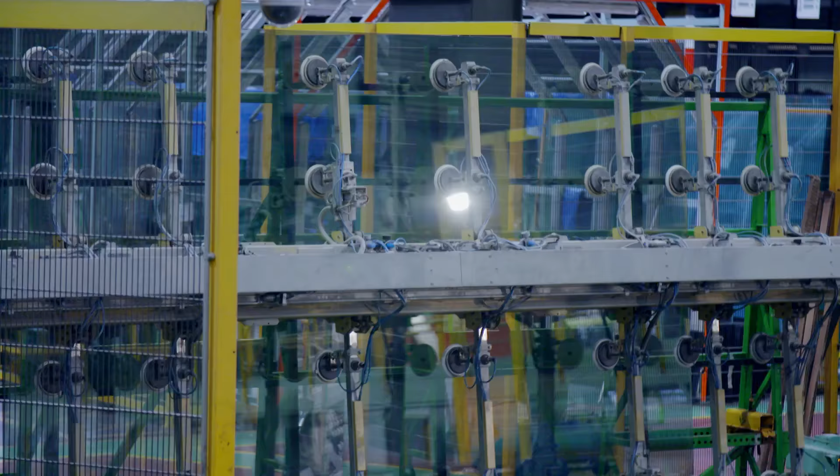With Pilkington's earth-shattering innovation, glass would revolutionize construction around the globe. Thanks to Pilkington's innovation, suddenly glass skyscrapers were cropping up all over the place, and you'd be hard-pressed to find a skyscraper that didn't use Pilkington's invention. Float glass didn't just change the way we look out onto the world, but it changed the way our skylines look forever.

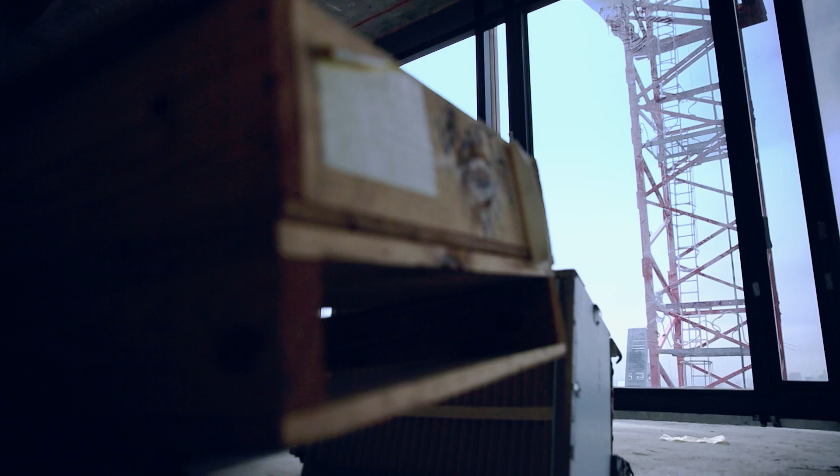70 years after Pilkington's inspired idea, New York's greatest engineering minds are using float glass to afford a vista unlike any other on Earth. Pat Feehan is overseeing the installation of 111's super-sized insulated glass units. So on the exterior facade, this is the exterior facade of the glass. So there's 3 individual pieces of float glass made up into these glazed units.

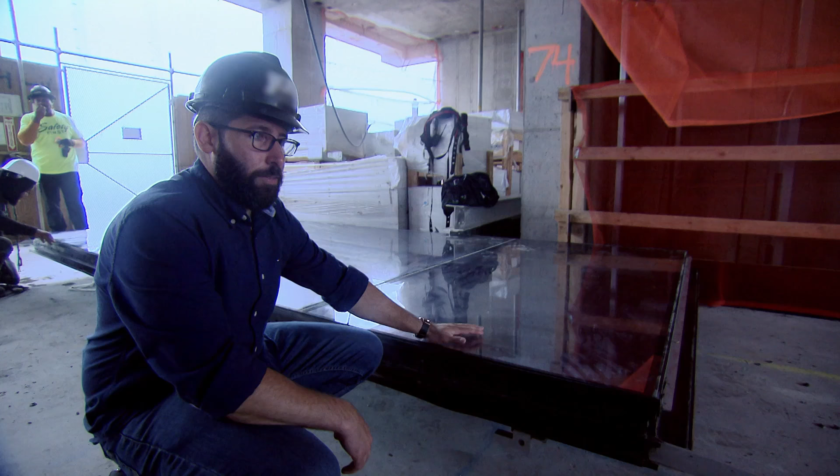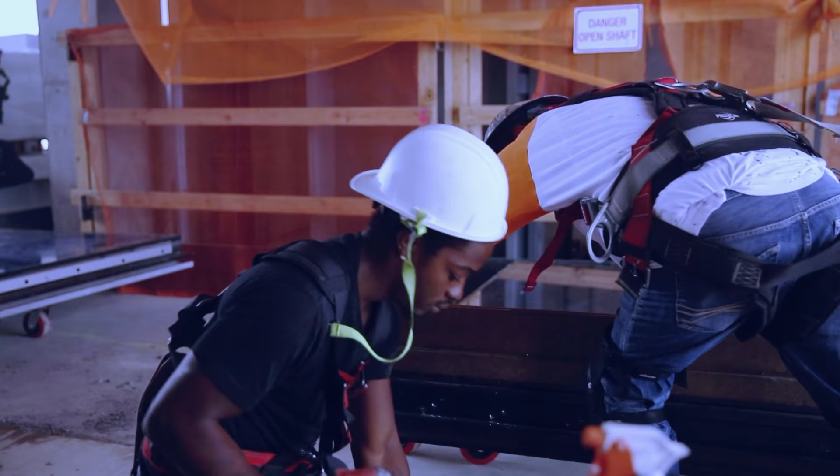They have 2 pieces of laminated glass on the exterior facade, and then 1 piece of a slightly larger, thicker glass on the interior facade with a 12-millimeter argon gap. The technology that goes into the glass in particular allows us to make the panels that we can make today. And if it wasn't for the float glass, we wouldn't be able to make panels like this.

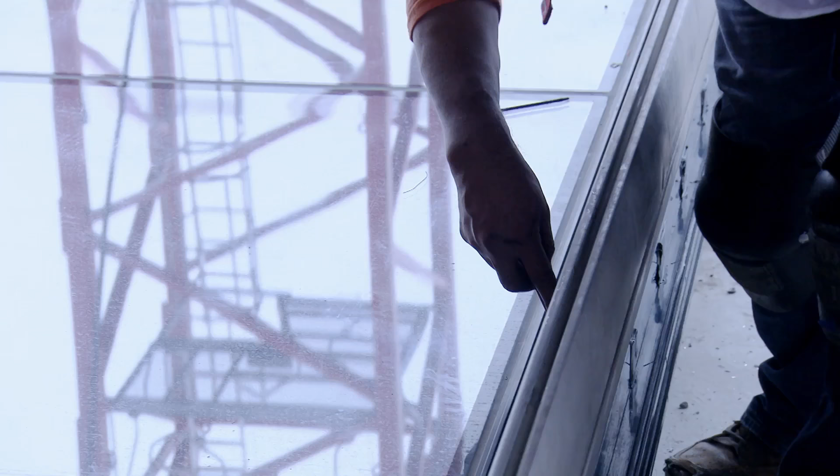The tower's massive glass panels owe their immense strength and clarity to the float glass method. So the actual essence of the glass itself is pretty fundamental, but the technology that's come around along it has allowed us to get larger panes of glass, stronger glass, and allows us to push the material as far as we can go.

Although each apartment has solid east and west shear walls, they're completely open to the north and south. The team's task is to fill a void over 18 meters wide and nearly 5 meters high on each floor with huge panels of crystal clear glass to minimize view-obstructing joins. The largest panel, which will form the centerpiece of each apartment, weighs over 1 metric ton, as much as a small car.

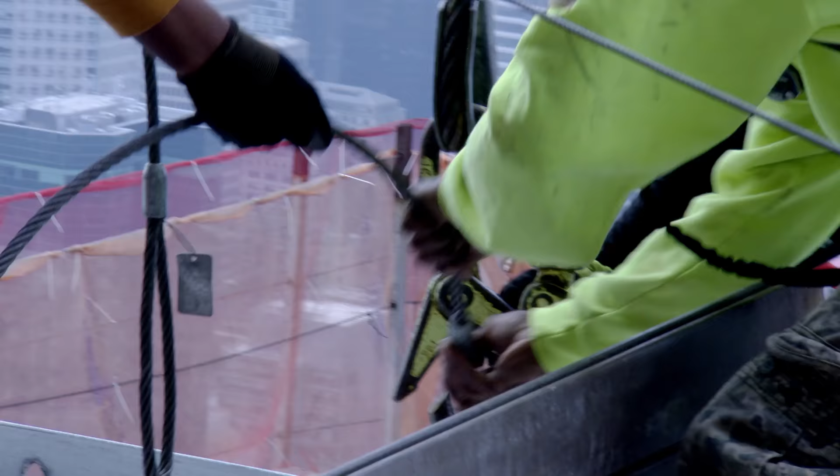Installing these mammoth window panes at extreme heights is a formidable operation. So right now we're getting ready to install this panel, so we're gonna be flying it out from this floor. The tower crane's gonna come down with the hook, we're gonna hook it up, and we're gonna send that panel out and install it onto 69. It's not a typical install, because the panel is so large, gets caught in the wind, it could blow around. Everyone has to be on their game a little bit more.

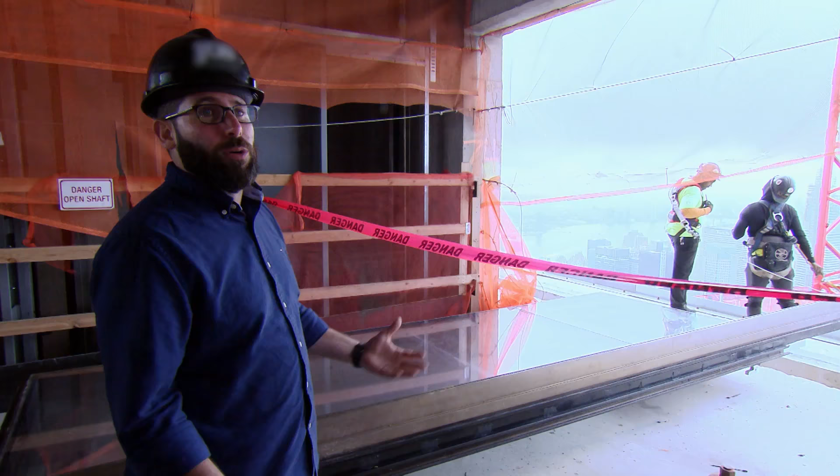To be doing this work, you have to be able to deal with the height and be able to deal with working on the slab edge, which is not an easy thing to do. Just hold on to that, Billy. The fearless installation team push extreme construction to the very edge. The oversized heavyweight panel is lowered 5 floors down. One wrong move could spell catastrophe. We're going down to level 69 where this panel's gonna get installed.

With the success of the installation hanging in the balance, the team need to work quickly to secure the panel into the interlocking weather seal. Hold that. So we have one panel now installed of over 6,500 total on the building. Installing panels one at a time, it doesn't feel like you're getting anywhere, but after a while, they start to add up. We're on the 69th floor right now installing panels. We're approaching the end, which is kind of incredible.

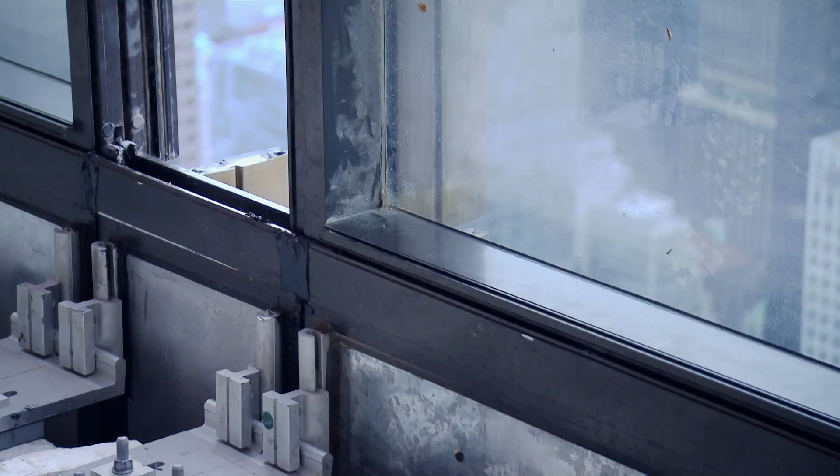There's a lot of amazing things about 111 West 57th Street, but I think one of the key things and one of the biggest selling points is the view that we have here. The technology that has gone into making glass has progressed so much over time that it allows us to make panels the size that we have here, to have them as clear as they are, to have the views that we have. We have the whole entire skyline to look at. It's kind of incredible.

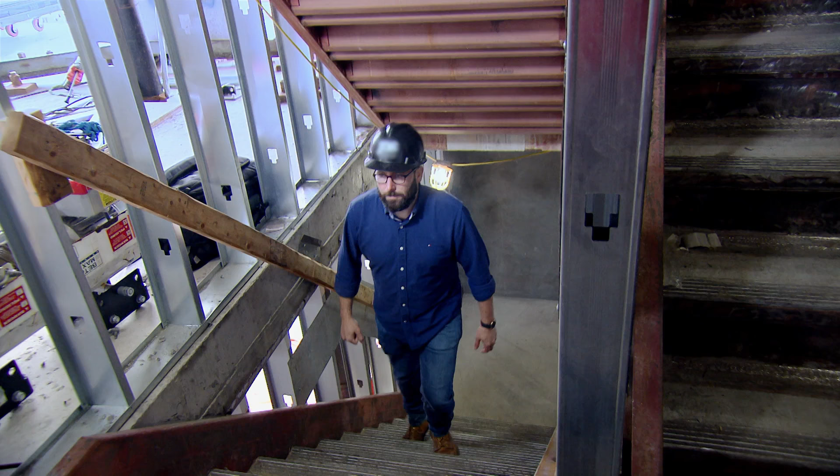For the team behind this daring project, the engineering achievement is immeasurable. Looking at a postcard 20 years from now with the skyline of Manhattan, it's going to be a building that I built on there. It's kind of incredible. Every day we look at the building, see it grow. It's really incredible, and we feel very lucky to be part of the team to work on this. No matter which aspect you look at this building, it has definitely enhanced New York City skyline. It's taken pieces of old New York and new New York and combined them together and created something that the world has never seen before.

The super-slender skyscraper that has defied the impossible, pushing the limits on tower construction further than ever before. A new landmark, vanishing into the clouds, changing New York's skyline forever. Standing testament to the incredible work of some of New York's greatest engineering minds. The super-slender tower represents impossible engineering on a staggering scale. Every stage of this groundbreaking enterprise poses unimaginable challenges.